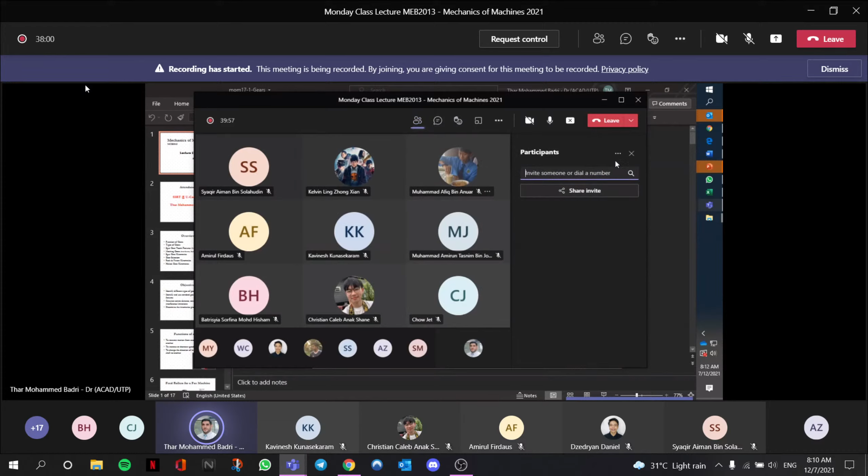So we've got a new material today, which is gears, the last chapter of MoM. We're going to learn all the types of gears, and we will take spur gears particularly under scope to check.

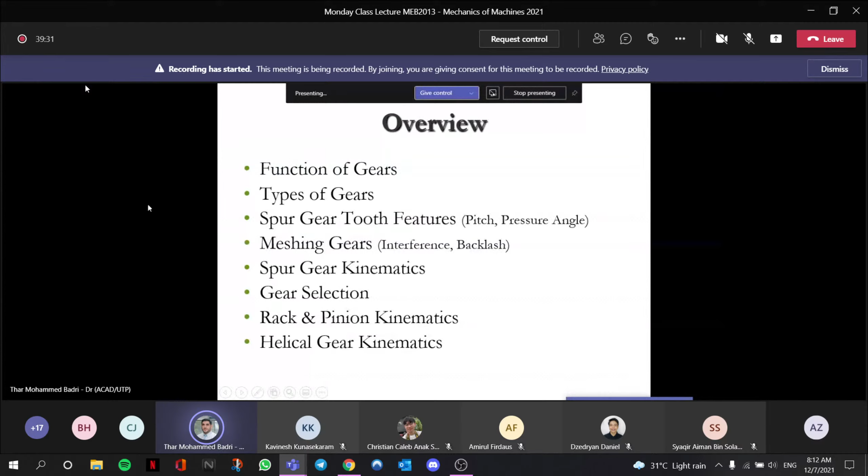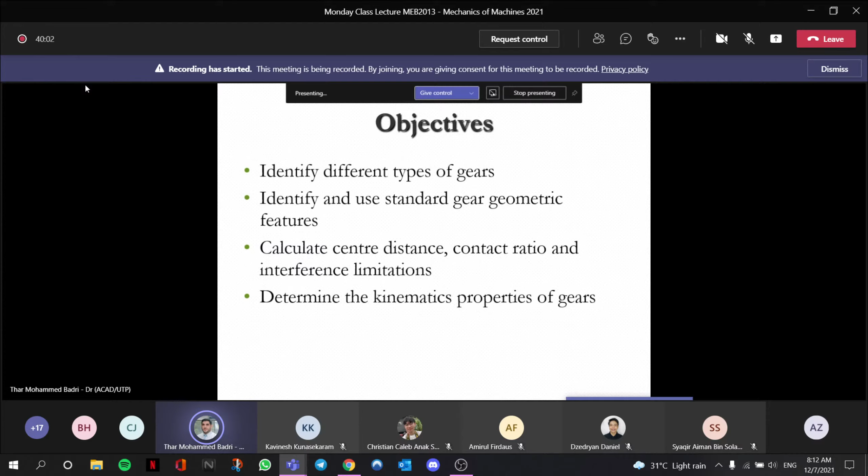By the end of the subject, we will be able to identify the type of gear. We will learn how to use the standard for selecting gears and how to calculate the basic analysis for the gear - center distance, contact ratio, interference limit - and then we will determine the kinematic properties of the gears.

Now gear has a function to transfer angular motion into angular motion. Let's compare this - it transfers motion between two shafts. It is angular motion; the input and output will both be angular motion. So it transfers angular motion between two shafts.

Now let's compare gear and cam. A cam transfers the angular motion on the cam to linear motion on the follower - that's the difference between gear and cam. For linkages, it can be angular to angular, angular to linear, or linear to angular - all of that is possible.

Now the function of gear particularly is that it's a very useful mechanism for maximizing or minimizing speed by changing the diameter of the gears. When you change the diameter from bigger to smaller, you vary the angular speed, and then the torque also varies, and then you're able to vary the power. This is why it's very useful in cars particularly, because your engine provides only a constant speed, constant power all the time.

However, what you have to do is vary this power in order to get faster with low torque, or slower but high torque if you're climbing mountains or going on uneven road. So this is the way we use gears.

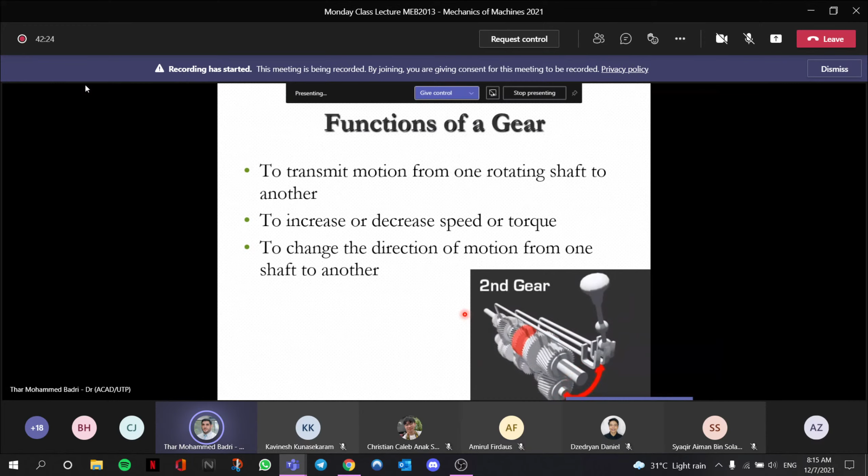Now comparing this to cam or linkages - they have no purpose other than to transfer motion. Yes, it can be magnified or minimized, but not as compared to gear. So gears are a disc with teeth - not necessarily, it could be friction without teeth, but these gears are two discs engaged by a friction surface, you could say. When one turns clockwise, the other will turn counterclockwise.

Gears could have teeth, so the tooth forces engagement with the other part, or there could be no tooth at all, just friction. The friction between the two wheels is responsible for producing the force to transfer motion between the two discs.

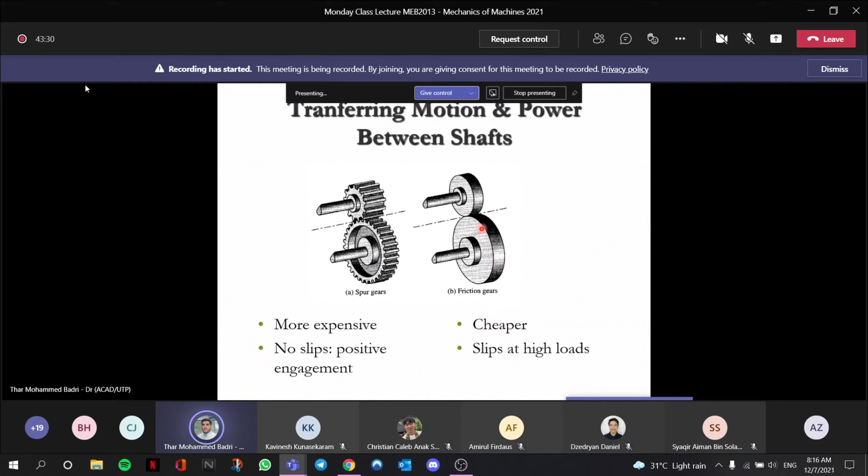Those with teeth are more expensive, but give positive engagement with no slip. Those without teeth are cheaper, but sometimes slip at high load.

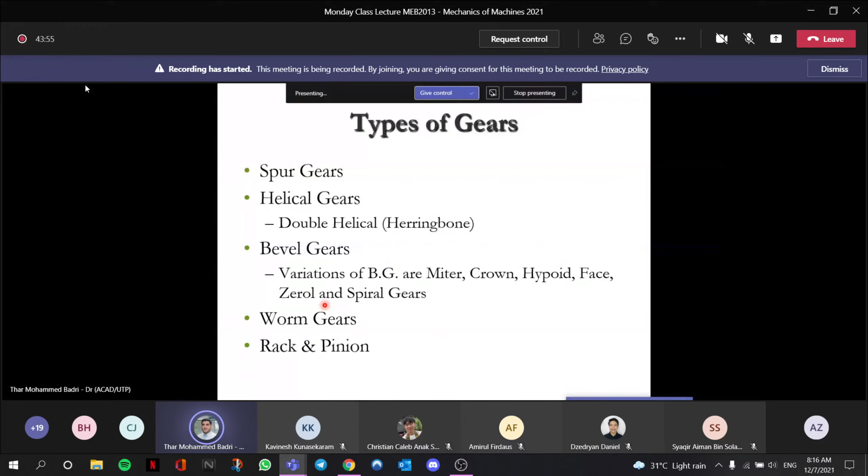Now we have a few types of gear: bevel, helical, spur, worm, rack and pinion, depending on the configuration of the gears. Under bevel there is a huge group: miter, hypoid, face, Zerol, spiral gear - all these can be considered as bevel. These are the three families of gears.

Spur is two parallel shafts with longitudinal teeth. Two parallel shafts with longitudinal teeth. Helical is the same as spur, two parallel shafts, but the teeth are inclined. Teeth are inclined. So two parallel shafts, but teeth are inclined.

Rack and pinion: one shaft, the other linear. This is more or less like a cam. One is angular motion, the other is linear motion. This is what we call rack and pinion.

Then we have bevel gear. If you notice, bevel gears have perpendicular shafts, not parallel shafts. These are parallel shafts, but these are perpendicular shafts, and the teeth are straight relative to the shaft, so they are bevel.

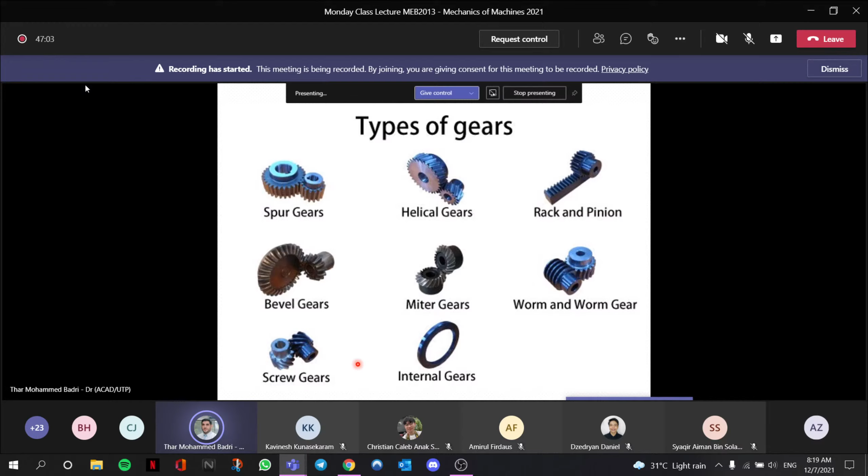Let's take them one by one. We were going to discuss spur gear. Normally we call one the driver and the other the driven - from the name it's clear the driver is the one connected to the motor, and the driven is the one at the source of the output motion. As mentioned, it is a parallel shaft, and the teeth are also parallel to the shaft.

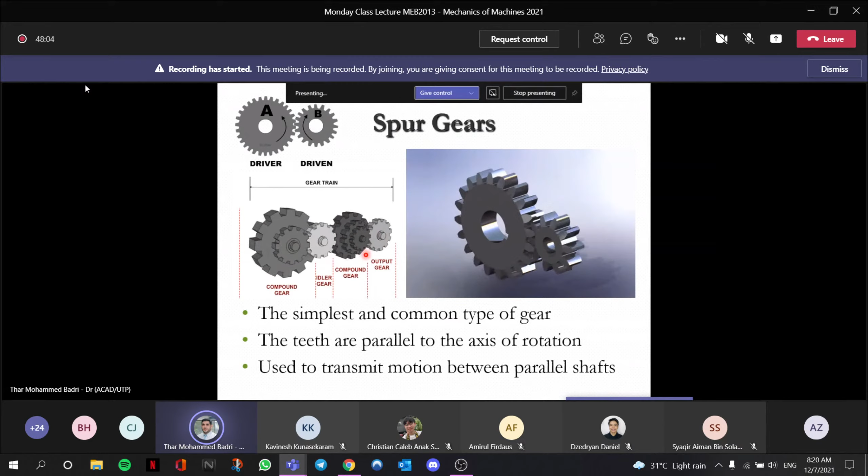Spur gear could be part of a train of gears. This one transfers to that one because they are both on the shaft. That one is responsible for reversing the motion, and consequently this train is used to magnify or minimize the speed.

Helical gear - from the name, this image is used for miter gear, screw gear, but particularly this one is the helical gear. I think this one, the helical gear, has a slightly inclined tooth. The shafts are parallel, but the tooth has some parabola or function causing an inclination.

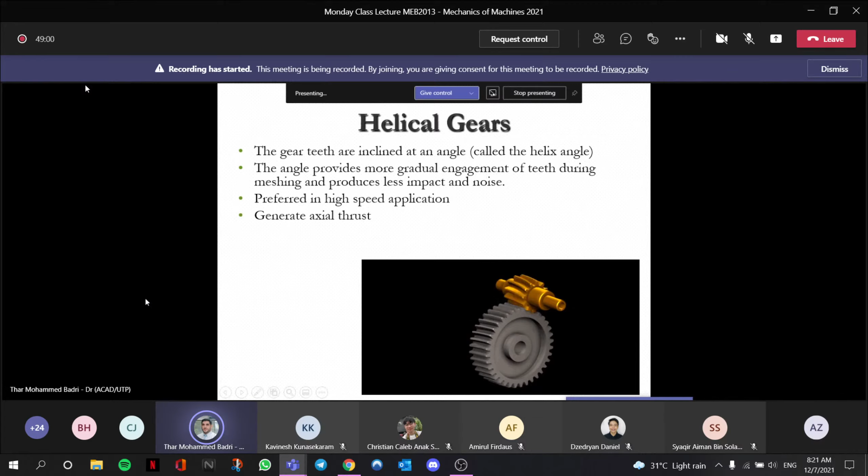It's not straight and flat. This inclination in the tooth is used to smoothen the pressure between the two engaged shafts. Helical teeth could be so inclined they form a triangular shape. This is also used for certain applications where the thrust needs to be balanced.

Now, looking to bevel gear, there's two types. One with straight tooth like spur, and they are perpendicular - the shafts are perpendicular. So spur and helical, the shafts are parallel.

Now, it is a perpendicular shaft, but if you notice here, the teeth are straight, so this is the spur - sorry, the bevel was straight. The one that was inclined, we call it miter gear.

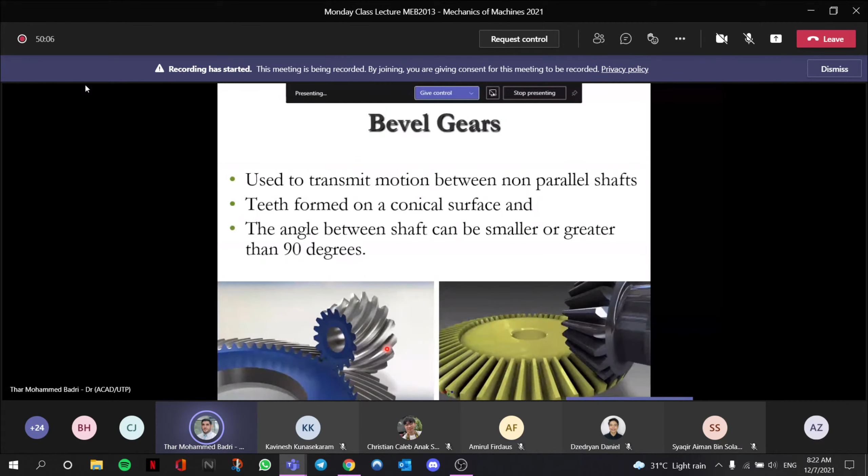That inclined tooth is like helical, but the shafts are still perpendicular.

Now worm gear is one like a screw which is connected to the source of motor, the power. The other one has teeth to engage with that screw. Notice if the screw runs clockwise or counterclockwise, the gear can run - so it can reverse the motion clockwise, counterclockwise, but the source of input cannot be reversed. So this one has to be an input, the worm. The gear has to be an output.

If I now try to twist the gear, trying to push the worm back, it will not be possible because the worm will be blocking the teeth from moving. So the worm has only one way to move - it can reverse the motion, but cannot reverse the action by changing the source of input to output. It's used to provide very, very high torque, low speed - that's why you can see it is really low speed.

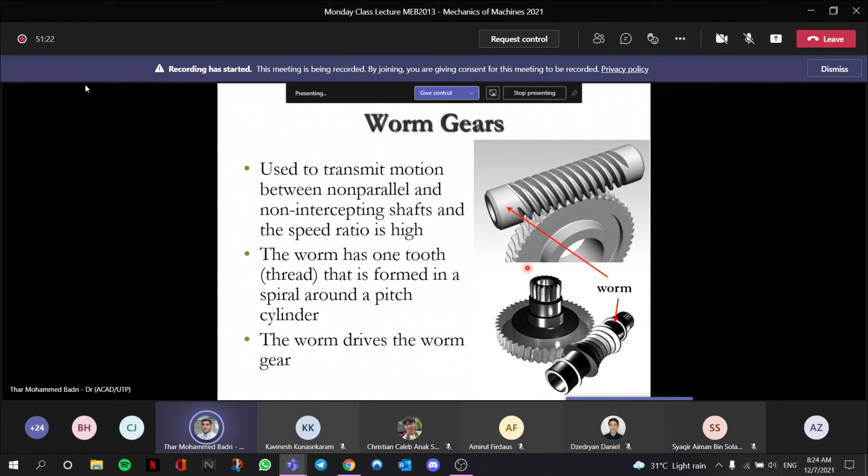Now rack and pinion is like a cam - it is changing angular motion into linear motion. Rack and pinion is used normally as a mechanism for specific applications to provide some small distance traveling for the rack. For example, in the steering mechanism in a car, when you turn the steering wheel, you are actually turning a gear and pushing the rack left or right, and then the rack pushes the tire left or right.

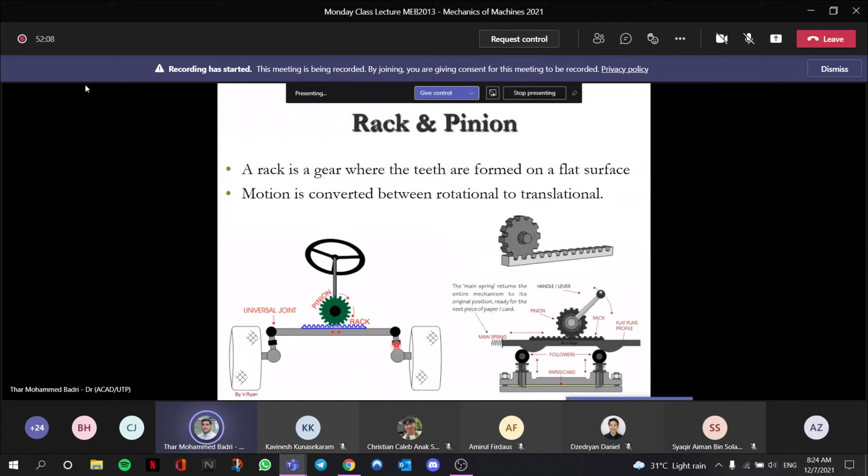An internal gear, or what we sometimes call annular or epicyclic, is the same as a spur, but the teeth, instead of pointing outside, point inside. So this is also possible, and instead of having this single feature, you could have so many features inside - the internal gear can pack many gears inside. That's why we call it epicyclic.

Epicyclic is like a solar system, and we call it this because it looks like having a sun - the one at the middle we call the sun - and the other gears between the sun and the annular are called planets because they turn around the sun. That's the epicyclic.

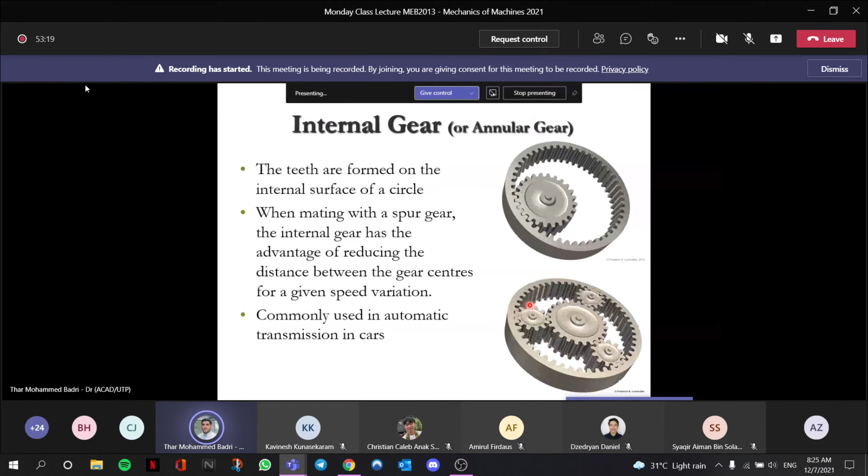I think that's all for the types of gears. Now let's talk about spur gears in particular - this was just an introductory section.

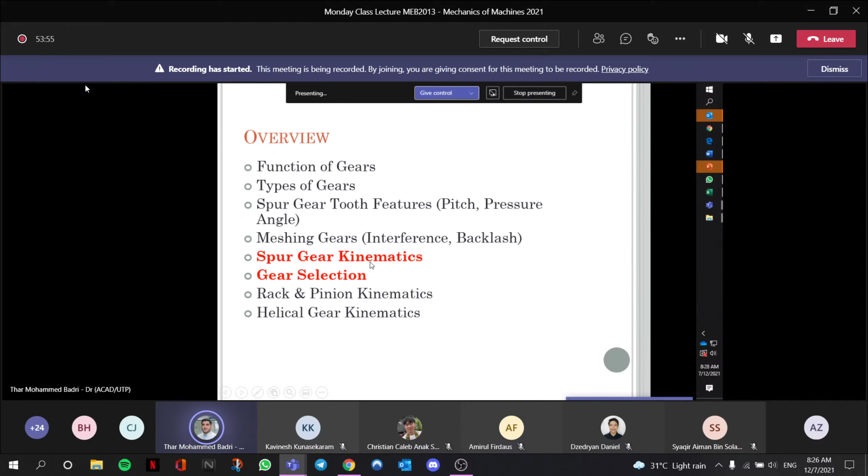Now let's talk about spur gear terminology. Terminology is more or less the same for all gears, but certain gears may have additional terminology compared to others. So we're going to talk about the pitch, the pressure, the interference, backlash, and all these features.

Now let's look at... let's remove this one. Okay, so these are the spur gear tooth features. The tooth has to be perpendicular, parallel to the shaft.

The tooth is an involute, and it has a geometry somehow like a parabola extruded. The depth we call the face width. The involute has an upper side we call the addendum, and a lower side we call the dedendum. This upper and lower is divided by the pitch circle.

This is the engaging pitch between the two gears. And the base circle, same as in a cam, we have a base circle - this we call the dedendum circle. Now, in a cam, the base circle is the most important reference.

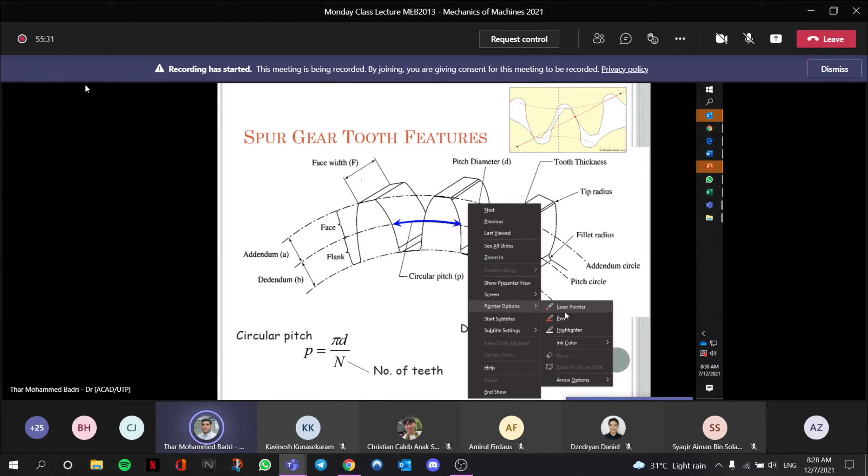In a gear, the pitch circle is more important and is responsible for all the calculations. The pitch circle is the one that divides the addendum and dedendum into half, and that pitch circle is a measure to compare between gears.

Circular pitch equals, in imperial units, diameter per number of teeth in the gear - diameter of the gear per number of teeth. So the diametral pitch could be the circular pitch changed to a diametral pitch, because the standard runs by diametral pitch, but circular pitch is the more theoretical one. Diametral pitch equals number of teeth per diameter - it's just like pi embedded in the pitch, so number of teeth per diameter.

So this formula is the most important in selecting a gear.

Let's look at the diametral pitch. Diametral pitch is a number used to standardize the gear according to the American Gear Manufacturers Association.

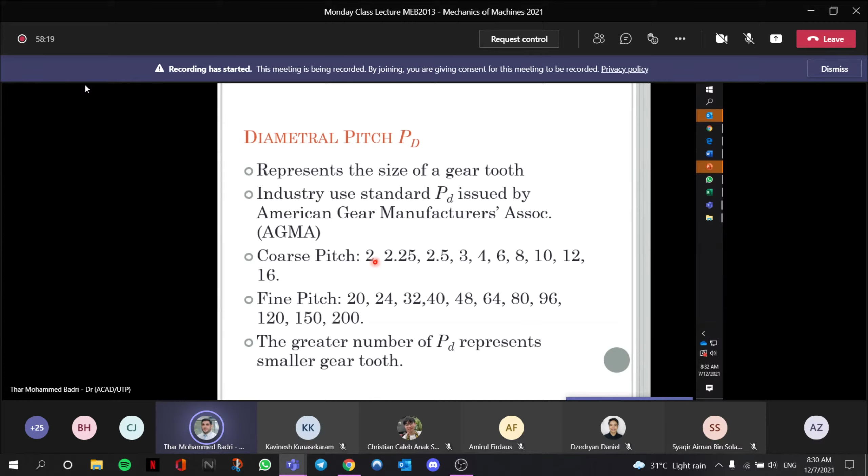So the greater number of PD represents a smaller gear tooth. A greater PD, like 200, is a really small gear tooth, while a smaller number of PD will be a really big gear. For example, 48 is a tiny tooth, while 3 is a really big tooth.

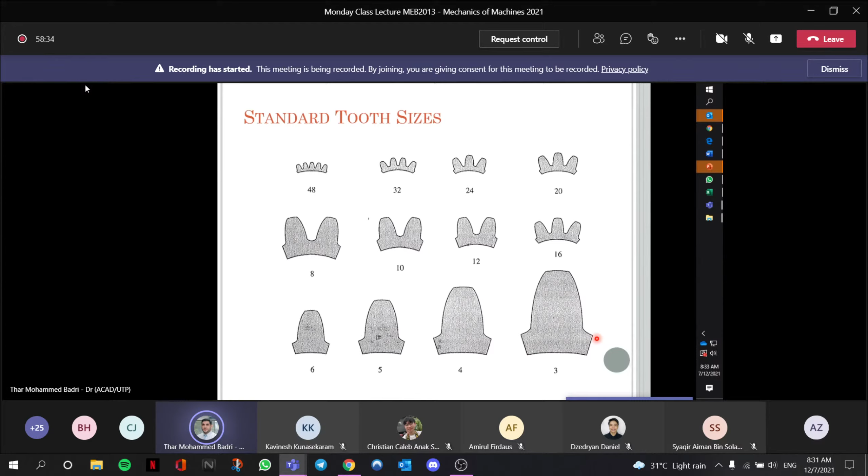Now let's look at the module. This one is SI technique, and that one is the imperial, which we used to use in assessment. Now SI we don't use in assessment, but just for your information, module is D over N. It is just like the diametral pitch, but multiplied by 25.4, which is the transformation of inch into millimeter. So SI has no difficulty, it's just changing the imperial to SI, and the equation is reversed. That was N over D, here is D over N.

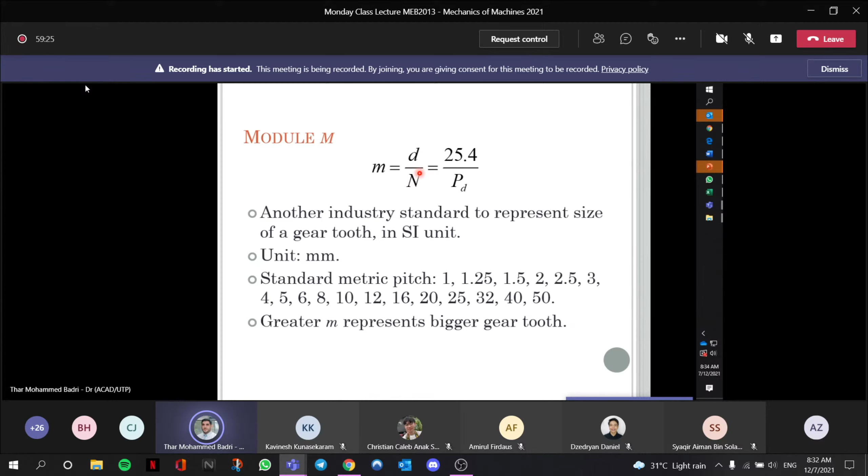Now looking at the force analysis in the gear, there is something we call the pressure line. You remember in cam we have a pressure line, which is the one between the center of the cam and the center of the roller, or the center of the follower, at the contact surface. So the distance between the centers is the pressure line in the cam.

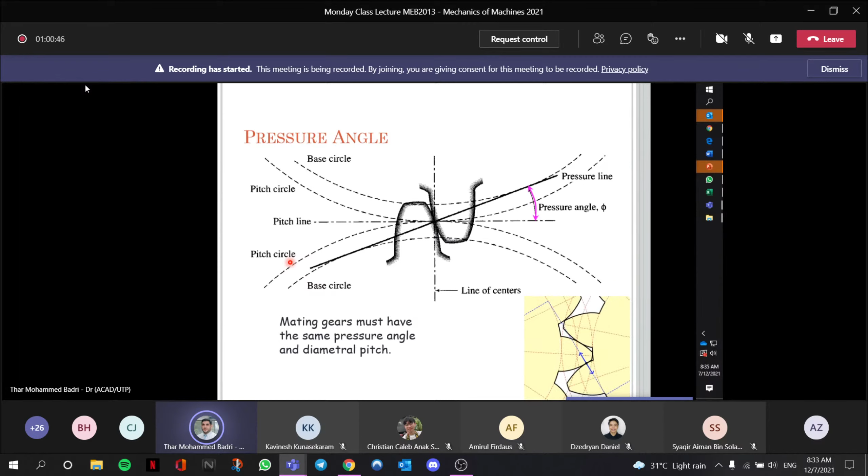But here the pressure line is the one touching gently the base circle of the gear and the base circle of the other gear, just a line tangent between the two base circles. That line is called the pressure line. You can see the line is blue here, with an arrow traveling. This line is actually where the contact happens, at the dot between these two arrows. So once the teeth are engaged, the contact happens and travels along this pressure line.

These pressure lines can differ depending on the involute shape. If the tooth is too sharp, it will have a high pressure angle but an undesirable radial load because the pressure is too high. The pressure will be resolved into X and Y components, and the X component will be a little bit more, causing undesirable radial load, and there's also a high possibility of interference, meaning the teeth get stuck.

Now if we try to fillet the teeth, making the radius of the fillet a bit bigger, the pressure angle will be 20 degrees. This one is 14.5, this is 20 degrees, and at 20 degrees it will be reasonable and moderate for all the scenarios of pressure, radial load, or interference.

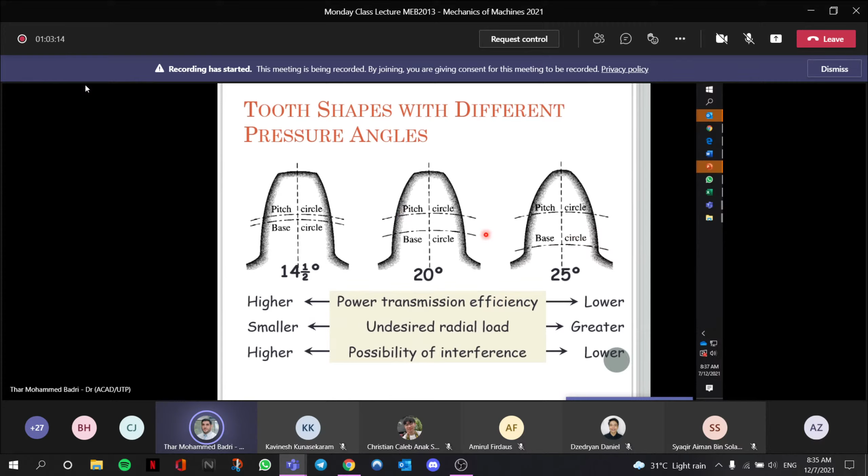If we keep smoothing the gear, making it too smooth, that will result in lower power but a greater undesirable load, and lower interference. So it depends - if you smoothen your gear, you lose power transfer between the two gears and may have more undesired loads, but less interference where the gears jam. So it's a trade-off between these three scenarios.

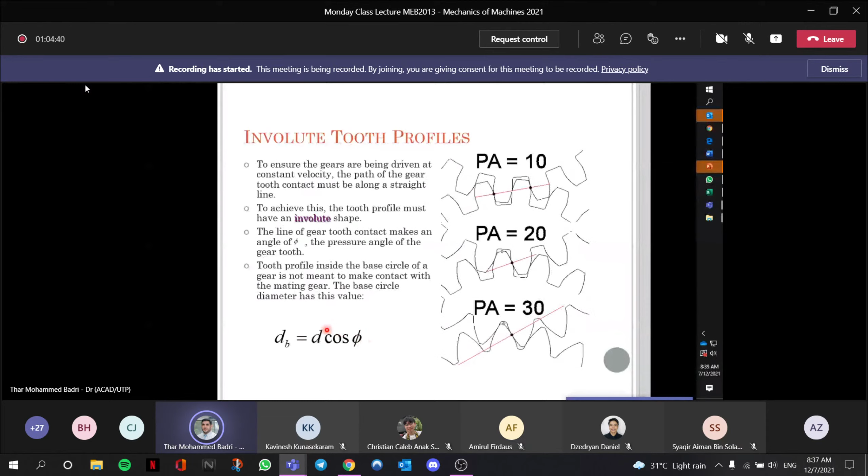Gear mating: the distance between the center of the gears, if it becomes shorter, there will be what we call jam between the tooth of the gear. If they become larger than the design, there will be a backlash. So to avoid that, we have to mate the gear perfectly, making the pressure angle exactly right according to what we have. So you have to make the line tangent to the two base circles, making exactly the same value of the pressure angle.

So the line, the one that may be here, let me show this line, sorry, I mean this line - it's difficult to do by mouse. This line, all this line has to be tangent to the base circle here. So this is the base circle of the other gear, so there has to be a tangent. Tangent means perpendicular on the radius, and also tangent from this side.

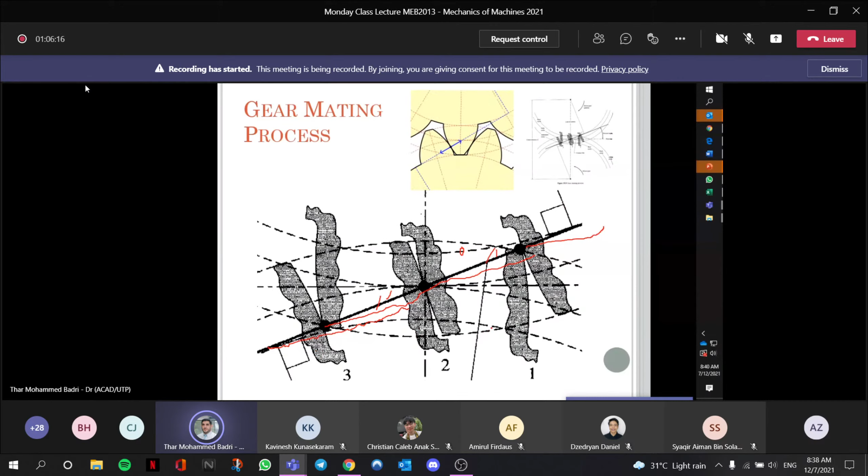Now, mating gear is not the same as meshing gear. Meshing gear is different - you can mesh 3 or 4 or 5 gears together, trying to create a train of gears.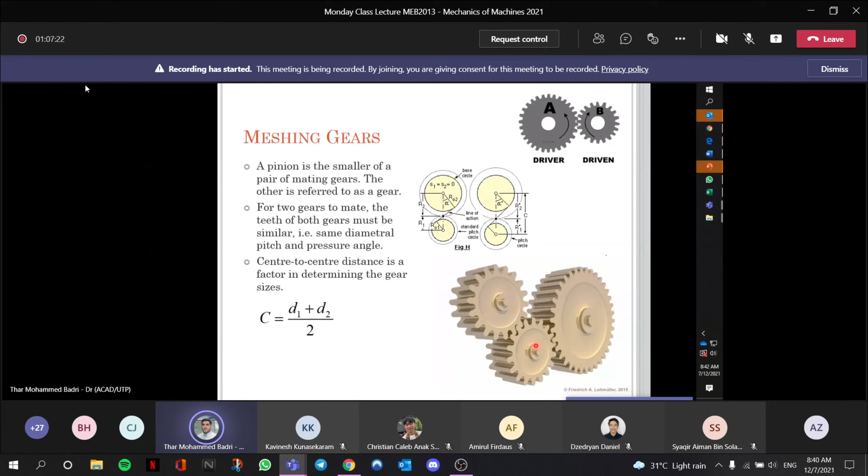The distance between the center of the gears - this is a very important formula, the second important formula. Just now we learned that PD is equal to N over D. Now the other one is the center distance between the two gears is equal to the average diameter of the two gears divided by 2. So you add the two diameters divided by 2, or you just calculate radius R1 and R2 plus together, you just add them. So this is the distance between the centers of the gears.

Contact ratio: contact ratio is how many teeth are engaged at once. So now here there is only one tooth engaged. You can see the spot, red spot, only one tooth engaged. But here we got two teeth engaged - one contact here, the other one contact here. So that will have a higher contact ratio. Here we can see contact, second contact, third contact, fourth contact - so we have more teeth in contact engaged.

When you get your gear in a larger diametral pitch number, there will be more fine teeth and the contact ratio will be more as well.

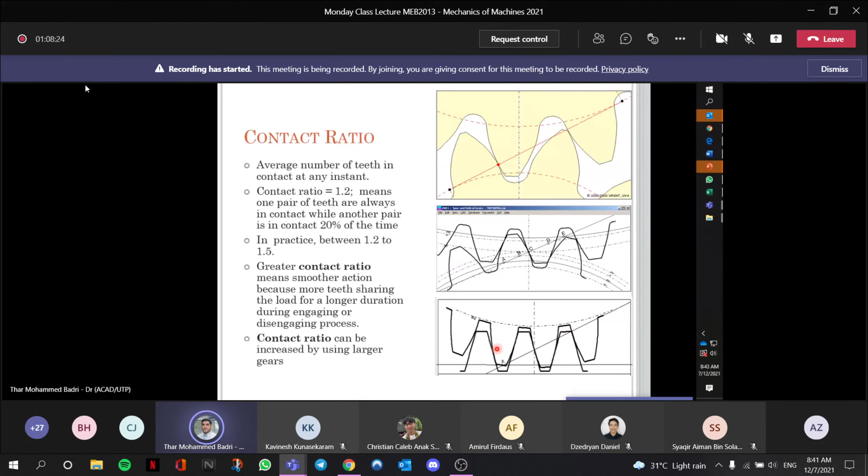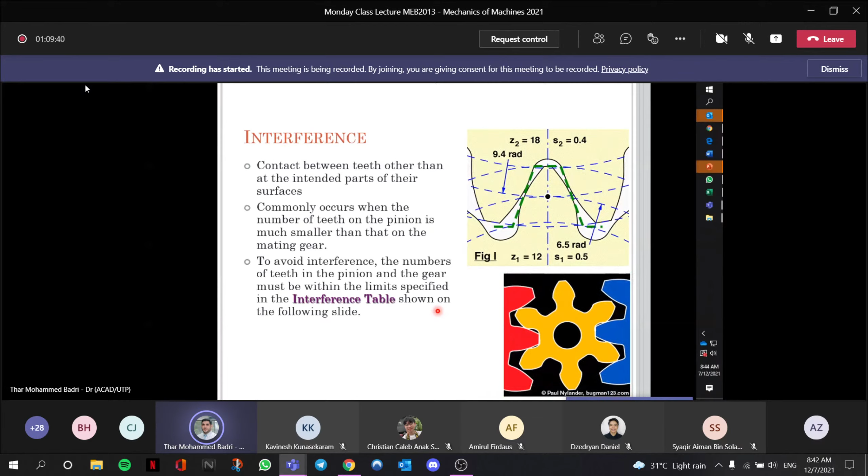We choose the teeth of the pinion and the teeth of the gear to be within the limit. Normally, the one responsible for interference is when you have a lower number of teeth, lower than 13 or 12 for example. That will cause interference because the circumference of the gear has to be divided by 13 segments, and that will cause interference. We will practically practice that later on.

Maybe just to give you an example: the standard is to choose a specific number of teeth for the gear. These teeth are the only ones commercially available in the market. So below 13, if you choose them, there will be a tendency for getting interference. For a specific pressure angle, each pressure angle has a different table.

Of course, I haven't mentioned what's the pinion and what's the gear so far. Pinion is the one we call the driver - just now I called it driver gear, driven. One driver, one driven. The driver is connected to the motor, the driven is connected to what we call the output source. So the driver here is also called pinion. So pinion, if it has 18 teeth, you can have an infinite number of teeth to be engaged with.

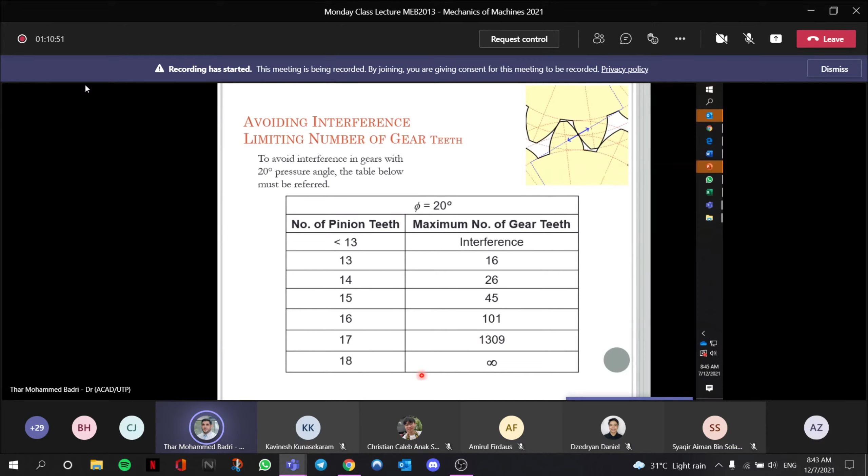To avoid interference, we can sometimes do a cut, undercutting the tooth. Sometimes it can cause trouble, weakening the tooth because it's reducing the root width, and that may subject the tooth to severe bending later on. But it also smooths the motion between the two gears where there has to be interference, no choice - it has to be in interference. There we may just use a little bit of undercut.

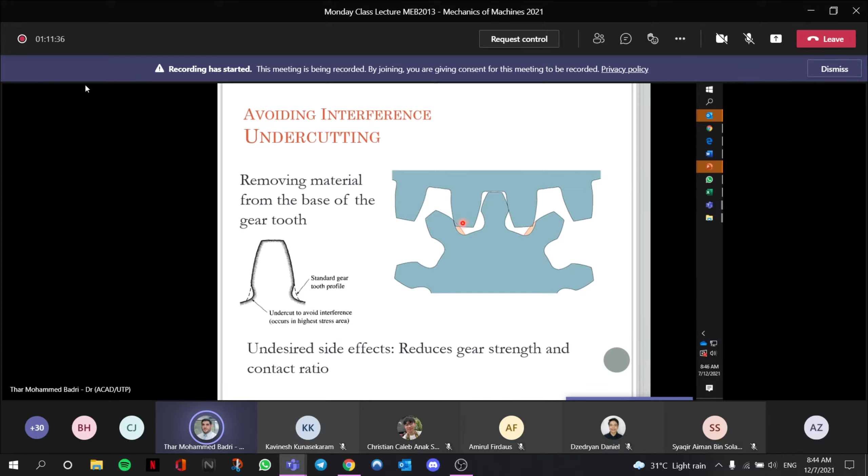Backlash: now backlash is things that happen when the two gears are a bit loose. That can happen when the central distance is a little bit apart, or the design of the two gears makes the driven revolute a little bit smaller than the driver. That may be a little bit different in the pressure angle by just a few degrees, 1 degree or 2 degrees - like say this is 20, this is 21 - or maybe just a cause of manufacturing issues.

Sometimes it's happening shrinkage in the manufacturing. So this backlash actually sometimes is good, sometimes is bad. It's good to allow for lubricant. It's bad because it causes vibration.

Or uneven thermal expansion. It's good to allow for lubrication and uneven thermal expansion, because these gears have to expand. When expanded, they will jam.

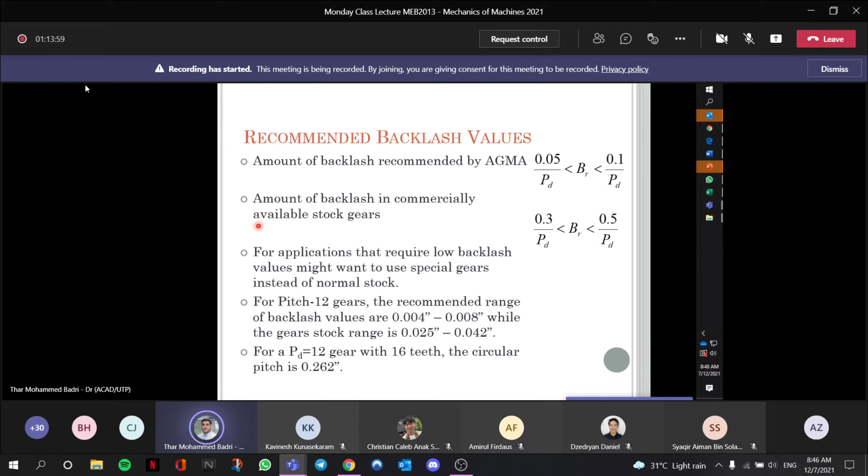Now let's talk about the gear kinematics. This is the kinematic of the gears, velocity between the pinion and the gear. Pinion is the smaller one and the driver. Gear is the bigger one, where it's driven.

For gear A, the velocity ratio between A and B will be the W of driver over the W of driven. Input, output, driver, driven, pinion, gear - this terminology may change, but the things are the same. All are the same. So driver should be the numerator, and the numerator will be the driver, and could be input or output.

This ratio will be inverse proportional to the number of teeth. So the ratio of input per output will be inverse proportional with the number of teeth. Consequently, it's inverse proportional to the distance, the diameter of the gears, and consequently inverse proportional to the angles between the gears.

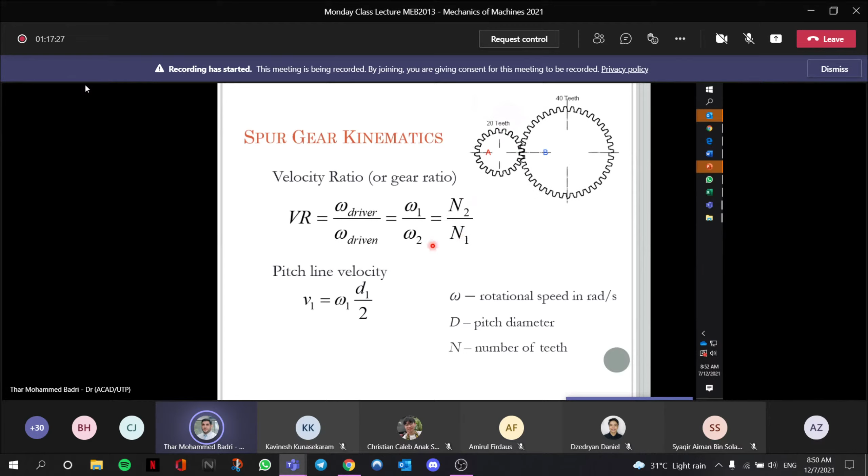Now we've got the input speed and the number of teeth, and we have the output number of teeth. By making a ratio between the input and output number of teeth, we will find the velocity ratio. Velocity ratio is inverse proportional with the teeth number, and direct proportional with the speed. By getting the velocity ratio, we can extract the speed of the gear.

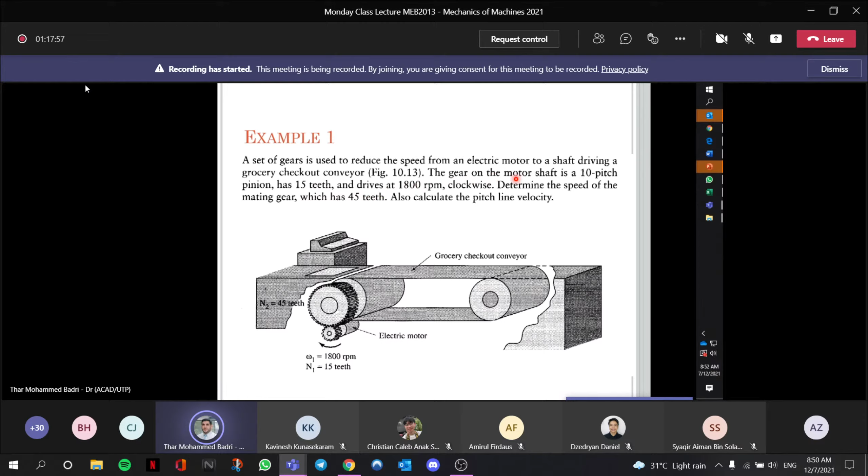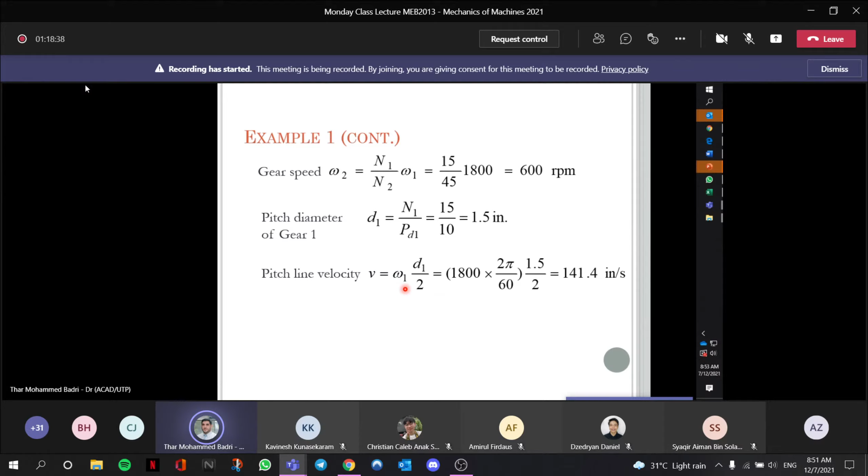So gear speed can be defined, then you can find it by the ratio of the teeth, then you can get the speed. For pitch line velocity, first you have to extract the diameter from the diametral pitch, because the number of teeth here - 15 and 45 - is given. So you substitute the number of teeth, get the pitch diameter, then get the diameter, and then just multiply angular speed by radius to get the linear velocity. As simple as this.

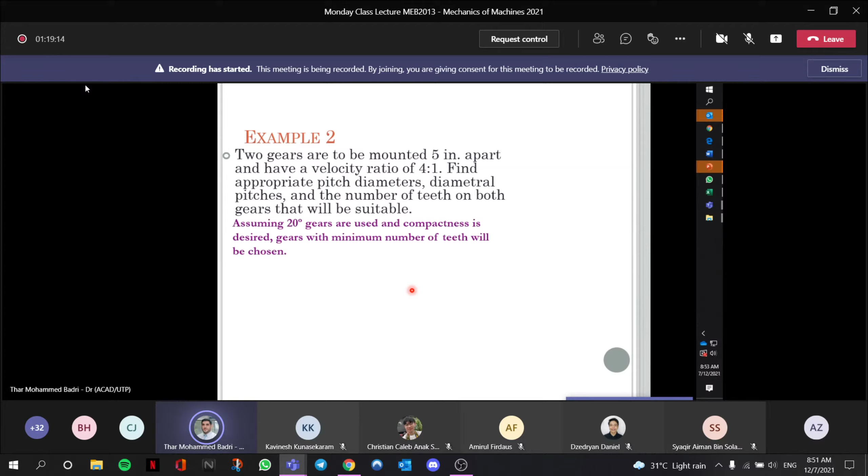Let's see some more examples. Two gears are to be mounted 5 inches apart and have a velocity ratio of 4:1. Find the appropriate pitch diameters, diametral pitch, and number of teeth on both gears that will be suitable, assuming a 20-degree gear is used, compactness is desired, and the gear with minimum number of teeth is chosen.

So the question says the gears have to be 5 inches apart, so the center distance C between the two gears is 5 inches. This is what we call C: the diameter of gear 1 plus the diameter of gear 2, over 2. So this is C, 5 inches. And then we have the gear ratio 4:1 - that's the velocity ratio.

Okay, the gear ratio or velocity ratio. How to find it, and the gears have to be 20 degree. So how do we choose two gears for that particular purpose? First, we have to reference the standard for avoiding interference. We have to select a teeth number and check. If I choose 13 for the pinion, the gear will be 13 times 4, so I have to check if it is bigger than the interference limit or less than it.

Let's try one by one. If I choose the pinion to be 16, 16 times 4 will be 64. So 64 is less than 101, so that it would be possible to use for this application. It is avoiding interference.

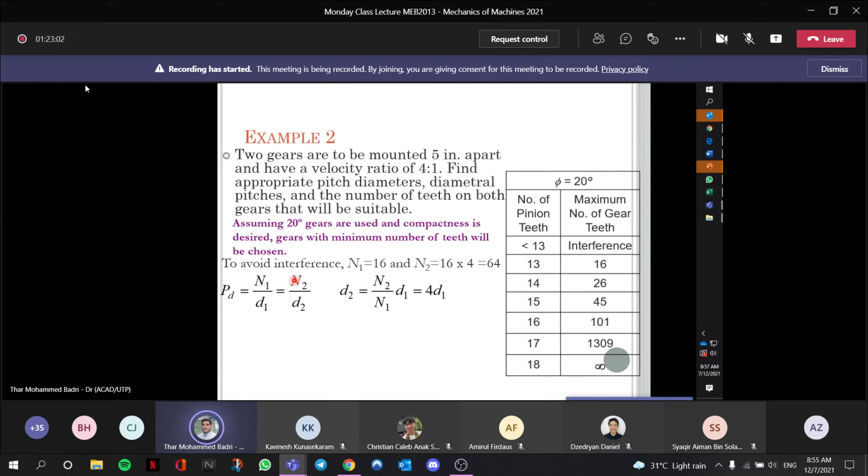Now the challenge is these gears: if I choose number of teeth 16, the other one is 64, that means I have to check the diameter, if it can fit 5 inches apart. So pitch diameter equals number of teeth per diametral pitch, and consequently the ratio is the ratio between the teeth, also the gear diameter, so that we can find two equations that we can substitute, giving D2 in terms of D1.

And D1 has to be 2 inches, because we have to mount these two gears 5 inches apart. So that will be one 2 inch, the other one 8 inch.

So the assembly is like this, we choose the gears from the table, from the standard. The spur gear selection depends on the diametral pitch, the pressure angle, the number of teeth, and the power transmitted. Now there is an additional factor to that.

The diametral pitch, the value inside the table here, can also be selected according to the horsepower required to be driven and the speed. Let's say you want to transfer a power of 10 horsepower from one gear to another gear, at a speed of 900 RPM, so the diametral pitch has to be 6. It has to be 6 in order to transfer 10 horsepower at 900 RPM.

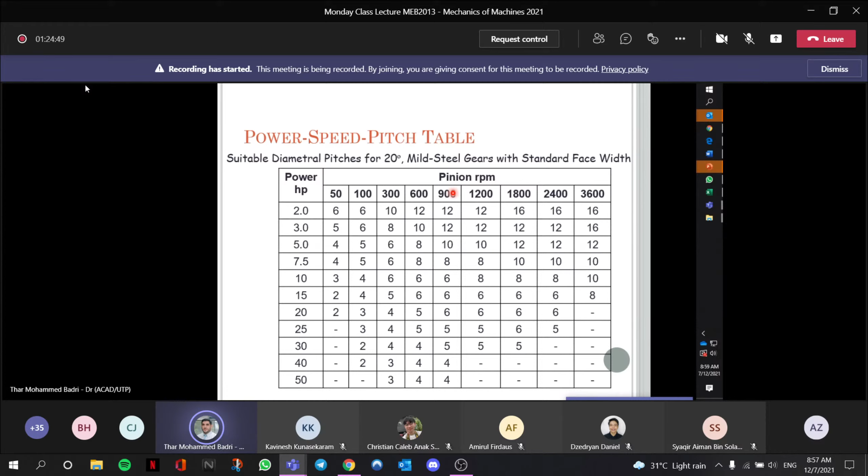Okay, now for diametral pitch, under each diametral pitch there are only a few teeth numbers available commercially in the market. So when you choose, like in the example just now, we chose 6 for 10 horsepower at 900 RPM. If I choose 6, I have to check: under 6, there is only this available set of teeth in the market.

Because in theory there's an infinite number of gears that can be manufactured, but in the market, manufacturing only covers specific sizes and dimensions, exactly the same as with screws. Screws and bolts run by specific dimensions: there's 4mm, 8mm, 6mm, 12 and 14.

This is similar to schedule numbers for pipelines. There would be an infinite possibility of manufacturing these mechanical elements, but we follow a standard. That standard is just to reduce the effort of manufacturing while covering a wide range of power.

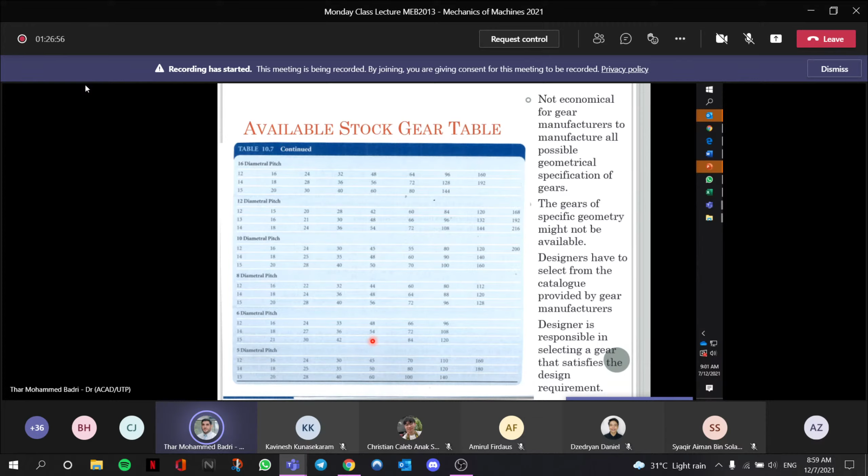For example, diametral pitch 6 covers 10 horsepower at 900 RPM, so you can use the teeth numbers that are available commercially. Just now, in our example, we chose 16 teeth and 64 teeth; we have to check: 16, yes, it is available commercially in the market, but 64 is not available. So we have to find another number, jump to 17, multiply it by 4, and so on.

Let me give an example here. A pair of 20 degree pressure angle mild steel gears are to be selected for an application where they need to transfer 5 horsepower, with the pinion driven at 1800 RPM. The ratio is 4. Determine the appropriate set of gears for this application.

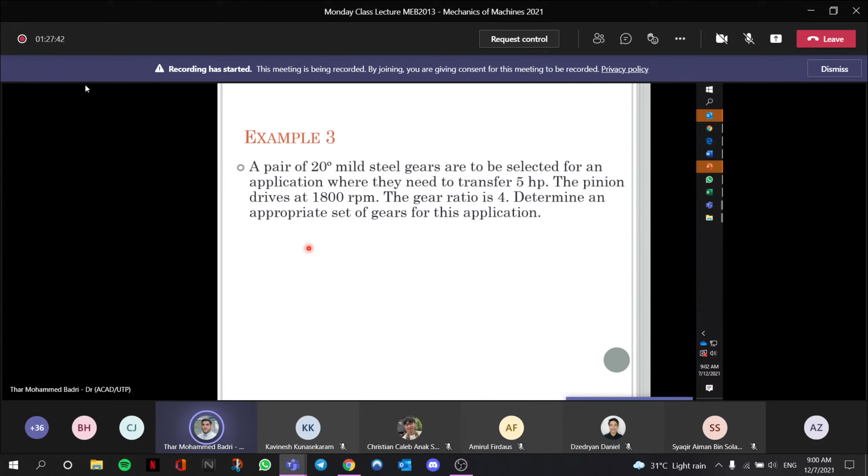So we got 20 degree, 5 horsepower and 1800 RPM. Now I think we have to go to the power table. 5 horsepower to be how much? 5 and 1800 RPM. So under 5, I check where is the 1800 RPM.

So we have to choose gears out of PD12, the pitch diametral 12. Now let's look to the 12 pitch diametral. If pitch diametral is 12, so that means if I gonna choose 13, my ratio, by the way, my ratio has to be 4. Gear ratio has to be 4.

So if I choose 13, that will be bigger than the maximum. 14 times 4, bigger than the maximum. 15 times 4, still bigger than the maximum. 16 is the one, the first making it smaller than the maximum, so that can be used. So 16 times 4 is 64.

But now our PD is 12. Let's check, under 12, this is the teeth that are available commercially. 16 is available commercially, but 64, there is no 64, there is 66. So 16 works, but 64 is not available, so we have to change, we have to propose another one.

Perhaps let's check 18 times 4, which is the velocity ratio. That will be how much? 72. Yes, it is available. So both 18 and 72 are both available commercially.

So the procedure is simply like this. First, you get the power and the speed, intersect on the table, and then find the appropriate PD. Okay, if let's say your speed was not 1800, it's 1600 RPM, so you have two choices of PD, either 12 or 10.

In that sense, if you choose 10, you will stress your system to run higher than its design. Yeah, if you choose 10, you will be trying to select gears that are supposed to work at lower speed. So that is a little bit stressing for the mechanism.

But if you choose 12, it is a little bit like over expenditure, to get more expensive than the requirement, but can operate with high safety factor. So you have to weigh the possibility if your speed is running between two things.

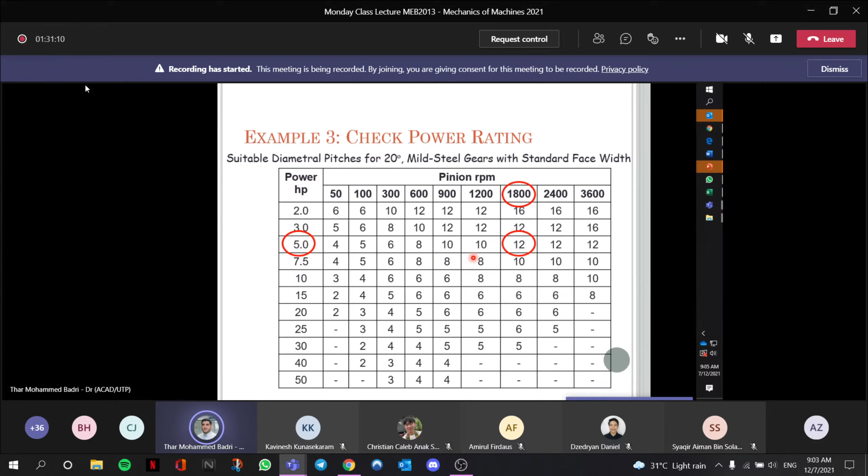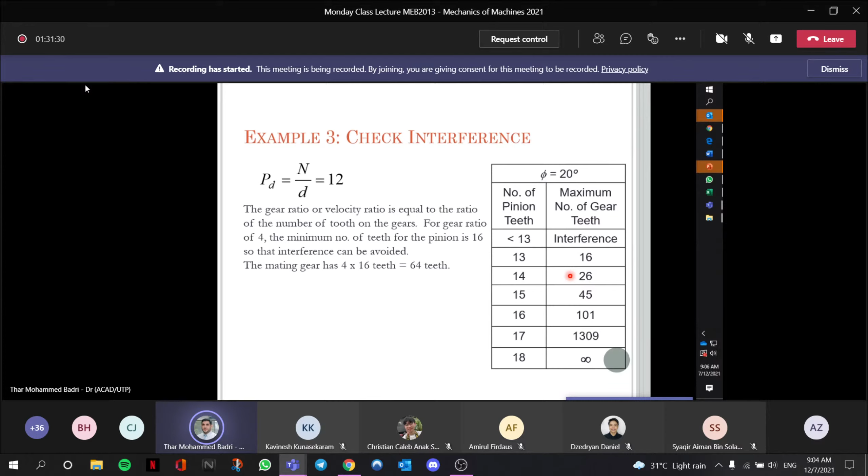Once you find diametral pitch is given, then you can get the diameters of these gears: the diameter of the pinion, and the diameter of the gear. Okay, any concern? This is the only tricky part in the gear. Any concern so far? No, sir. Okay, so maybe we can continue having some more examples.

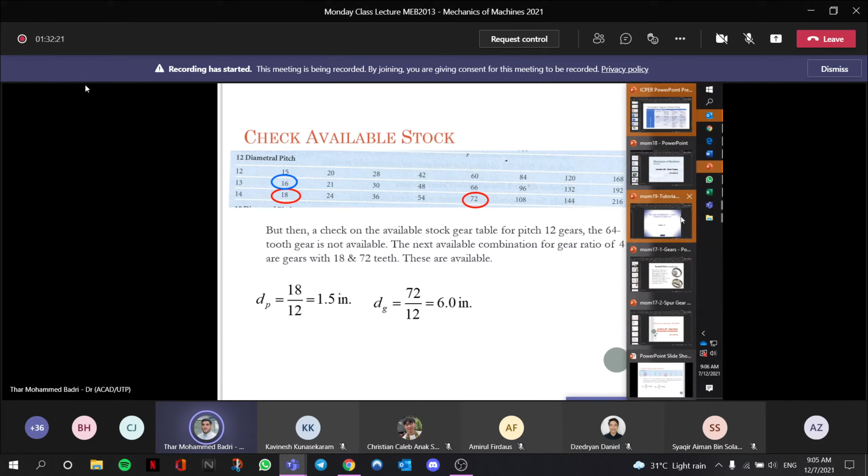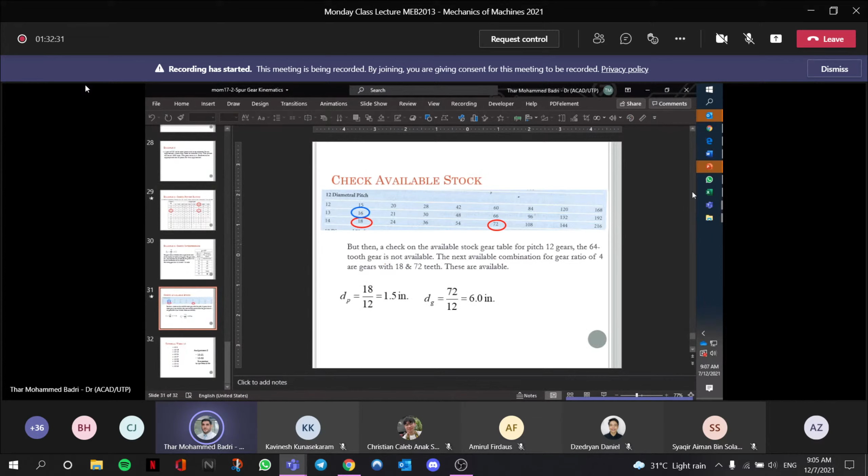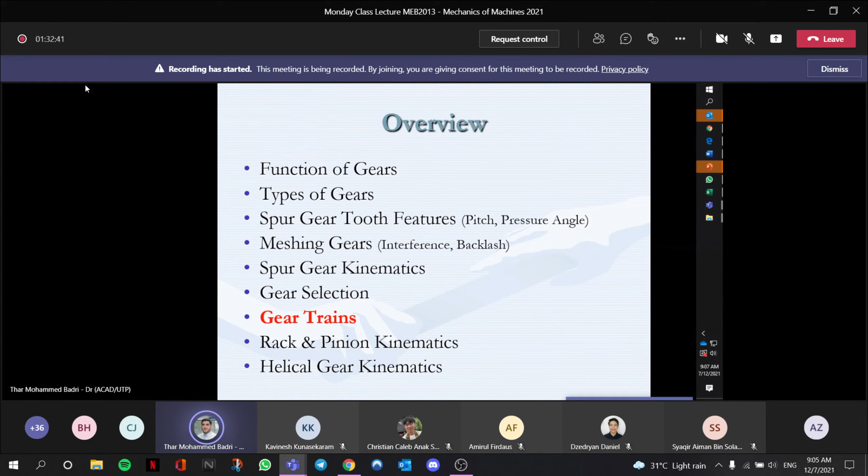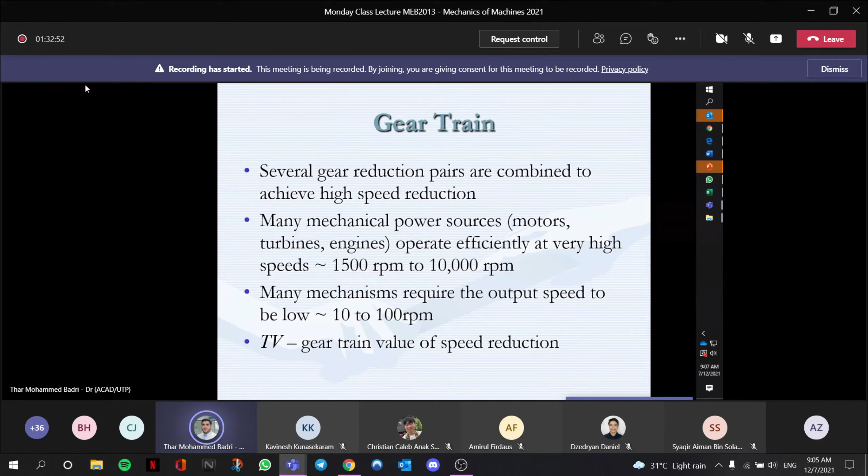No, let's continue on meshing of the gear. If we mesh a gear, the gear train, how is it possible to do the analysis? Now, in the gear train, when we have several pairs combined to reduce high speed or to maximize the speed, it depends. So when we have multiple gears, we have to find the train value.

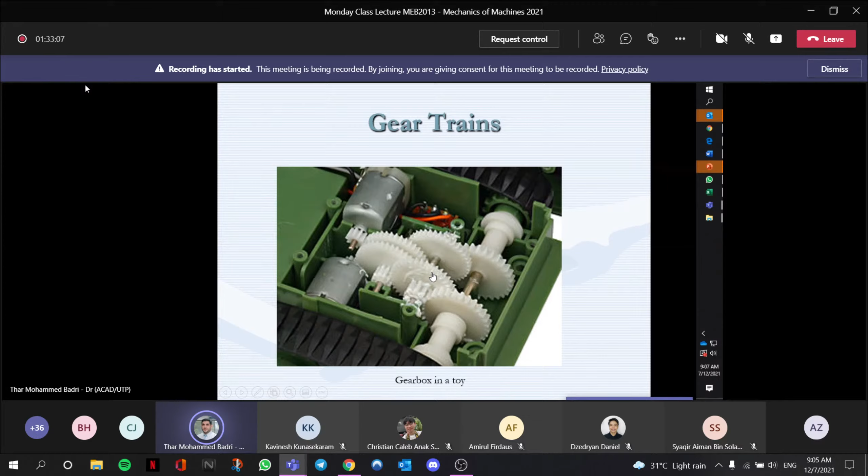Just now we learned gear ratio, for just two pairs. If multiple pairs, they will have a train value. Okay, the train value of the gears.

Now the velocity ratio, let's just go over this, this is the one that we learned from the previous material. Velocity ratio is the ratio of the driver over the driven, inverse proportional to the number of teeth. And linear velocity equals angular speed times radius. And diametral pitch is the number of teeth per diameter.

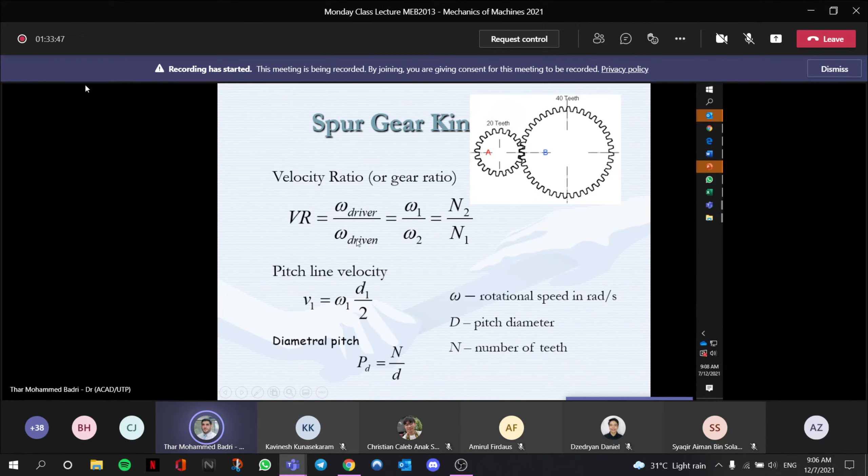Now the train value is more or less the same as the velocity ratio. It is the driver over the driven. But the driver now is the one that is the input source. The driven is the last one, not the second one, the last one. So this is what we call a train value, when we have multiple gears engaged together trying to transfer the motion. Okay.

Now notice here, when 2 engages with 3, there is a velocity ratio because this is driver, this is driven. Now 3 and 4 are actually two gears on the same shaft. You can see here 3 and 4, they are both on the same shaft, so this is only one speed, the same angular speed in 3 and 4 because they are connected to the same shaft.

Now let's look at 4 and 5. There is a change ratio, so there is a velocity ratio. But 5 is not transferred to 6 directly, it's just like the same wheel as 6, so both are on the same speed. 6 with 7 has a velocity ratio because there is a transformation. So we have this velocity ratio 1, second velocity ratio here, and the third velocity ratio here.

So the train value will be the multiplication of all these velocity ratios.

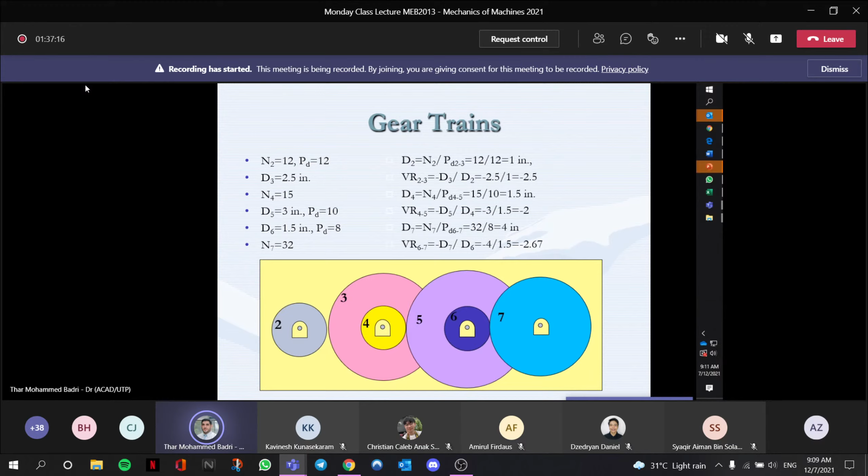So the velocity ratio between 4 and 5, and then the velocity ratio between 6 and 7. Once you find all these velocity ratios, the train value will be the multiplication of these velocity ratios: 2.5 times 2 times 2.67, just multiply.

Now why do we put this sign, which is minus? It's to show us the direction of the motion. Let's say if you just multiply all the signs together, three signs will result in minus, and that means it is reverse direction. If this is turned clockwise, that will make 7 counterclockwise, and you can try it. If this is clockwise, 3 will be counterclockwise, because there will be friction and linear velocity like this, so that will be counterclockwise.

4 also same as 3, counterclockwise. If this is counterclockwise, 5 will be clockwise. Let me go through it again: if this is clockwise, that will be counterclockwise. And 4 is same as 3, they are both on the same shaft, so counterclockwise. If this is clockwise, this is the counterclockwise.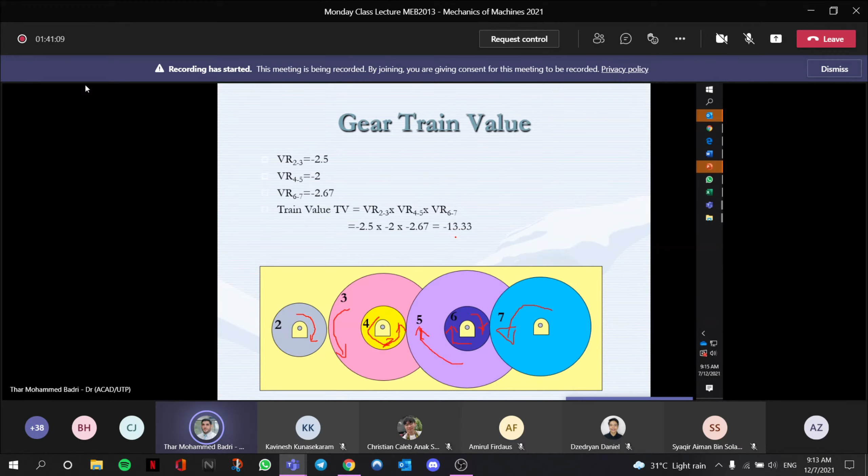So normally, if the gear train is big, just try to put minus for all the velocity ratios. If the train has an odd number of gear pairs, like one pair here, two pairs here, three pairs here — three pairs is an odd number — that will result in a minus value, so reverse direction. If an even number of pairs, that will maintain the same direction but magnify or minimize. So this is the way that we do for getting the train values.

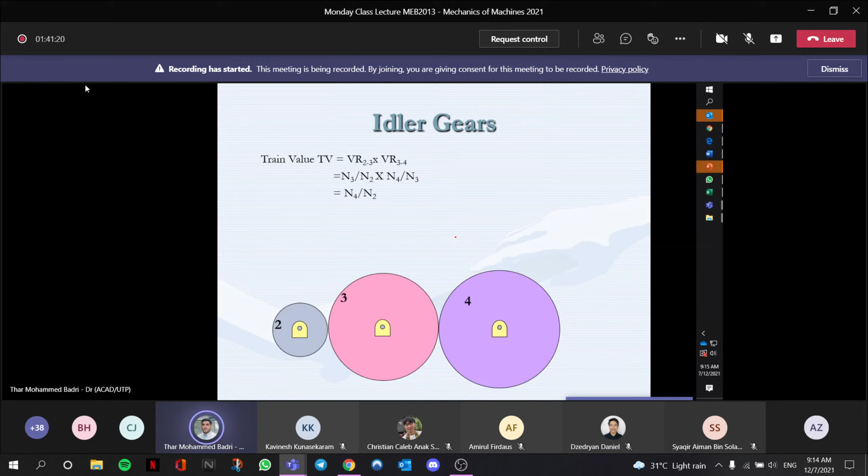Sometimes we have an idler gear. An idler gear is a gear that has no purpose other than just to reverse the motion.

So this gear has no purpose other than reversing motion. For example, this is clockwise. If we don't have gear 3, we have gear 4 directly engage with gear 2. Now you see 3 and 4 both same diameter, same size, so 3 has no variance to 4. So we can just ignore 3 and put 4 here.

If we do so, gear 4 will be counterclockwise. But if we want 4 to be in reverse motion, that means we have to have the idler, because the idler will have to be turning counterclockwise, and then it will force gear 4 to reverse its motion to be clockwise, same as 2. So this is what we use an idler for.

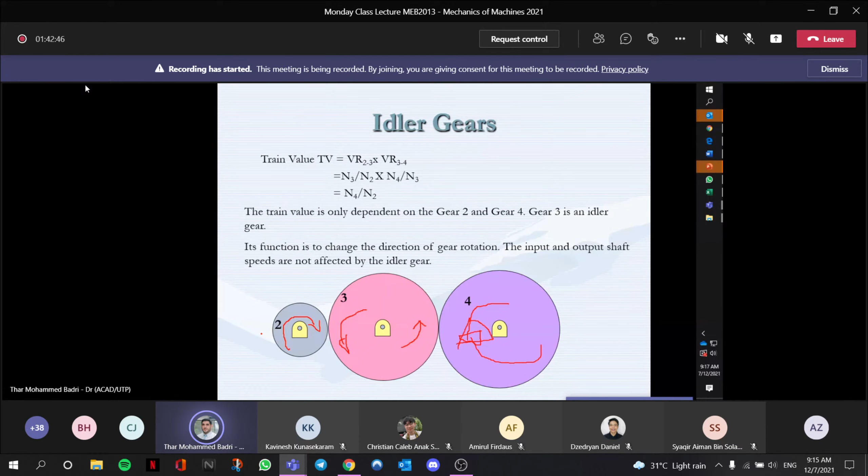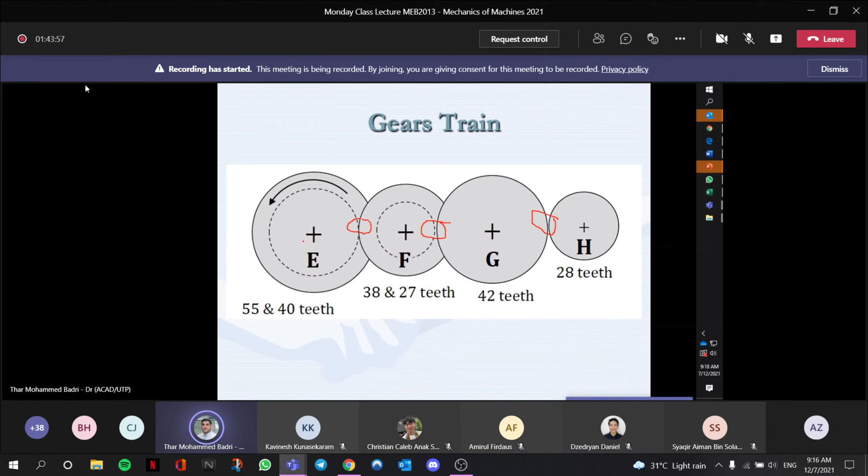So these train values, there are 3 pairs engaged: this one is first, this one is second, and that one is the third pair. Since 3 pairs engage, you just multiply the 3 train values. These 3 values, GH, FG, EF, just multiply them.

Okay, and yeah, maybe this is just for you for practice. Maybe I have a better one in the tutorials. I can get it in the tutorials here.

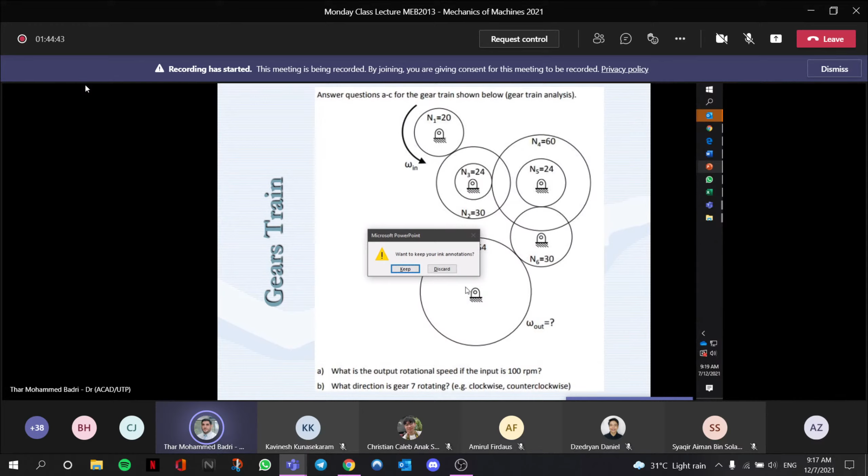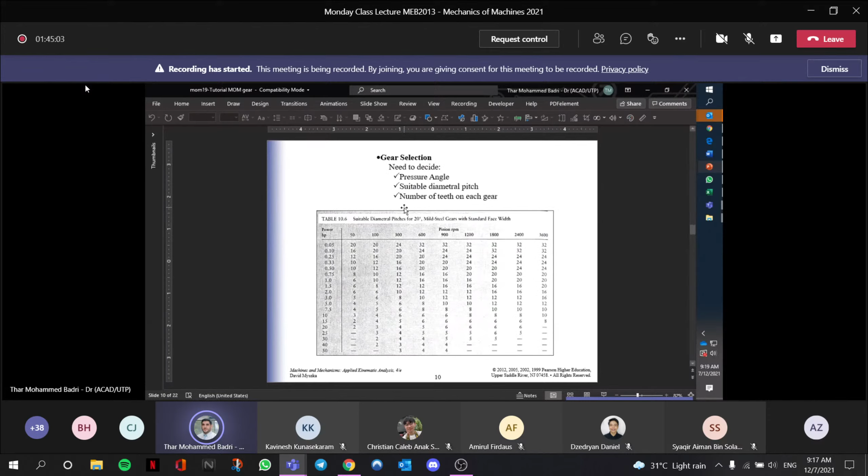The tutorials, or perhaps we can use this one, the tutorial one. Yeah, we can. Sorry, let me check. Okay, we were going to talk about these train values in tutorials, perhaps. I think I will stop here, and then we will have some examples during the tutorials. I got these examples to practice in the tutorial today.

So you can see here such examples as we use to ask for a question for exam 2. For exam 2, we have to have cam and gear together. Cam and gear together, not cam and linkages. Cam, linkages and gear will all be in the final exam. But in exam 2, we normally ask only on cam and gear. So this is the previous question during exam 1 and exam 2 for the previous semesters.

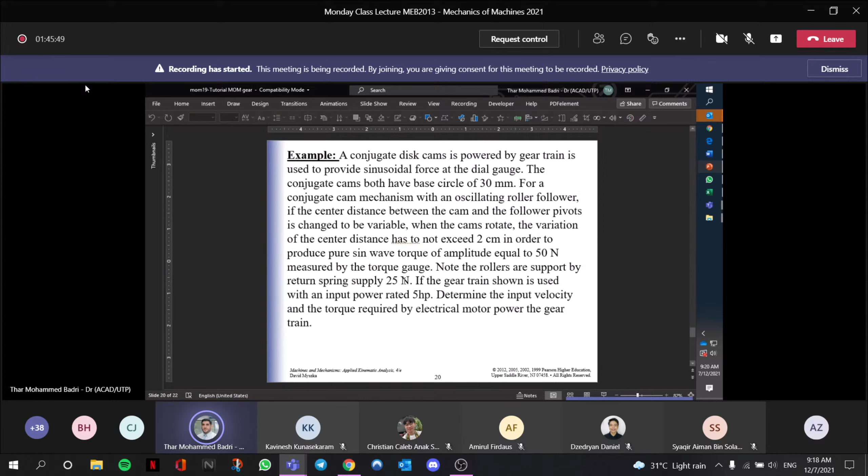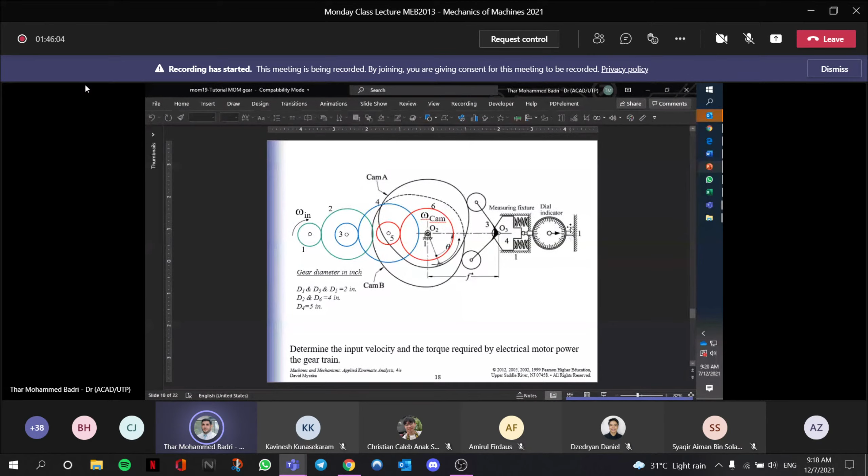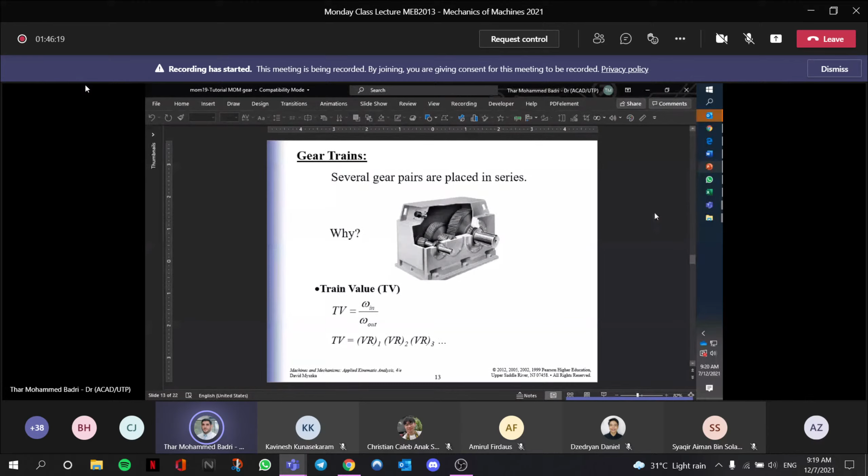We got this one, we got another one where you have to design the gear mechanisms to operate a cam, and the roller follower have to transfer the motion to a dial indicator, or perhaps a force indicator that will drive a sliding block and spring force. So we're going to talk about this tutorial during the tutorial time. So maybe I can meet you later on this afternoon during the tutorial time.

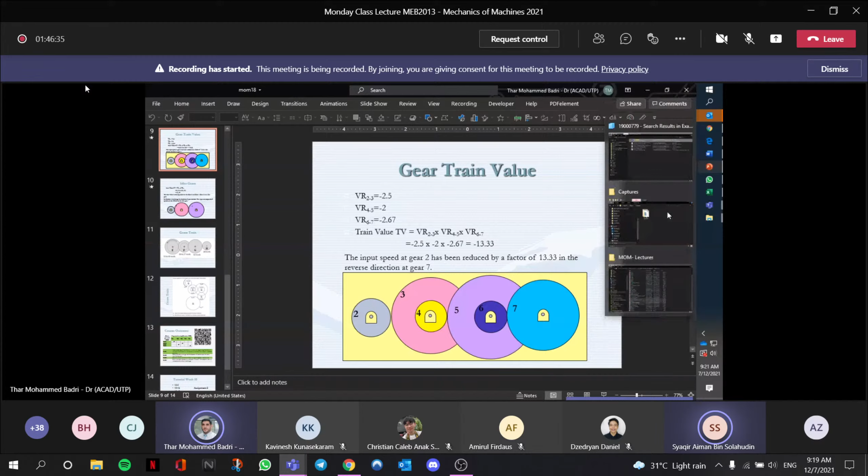So far, any concern about the train value and the gear? All clear, sir. Okay. So sir, for exam 2, it will be about the gear and cam. Sure, definitely, gear and cam. Gear and cam, yeah. Only gear and cam, okay? I know linkages, you probably hate linkages because it's a little bit of a lengthier procedure. Cam is much faster and gear is the simplest one. So we're going to have gear and cam only, and perhaps let us discuss the timing.

Let me stop recording. How about if I propose a test time to be Wednesday afternoon? Because Wednesday next week, yeah. Wednesday next week we have class from 12 to 2, and I think most of the ME students are free after that. But I don't think I can do an assessment Wednesday, sorry, I think it's not allowed by the lecturer, by the regulation of UTP. Wednesday is a free assessment day in the afternoon. So there's no choice other than using... Okay, or maybe Thursday? Thursday, I think some of us have class in the evening. Okay, so Friday next week, same time, 12 to 6, okay.